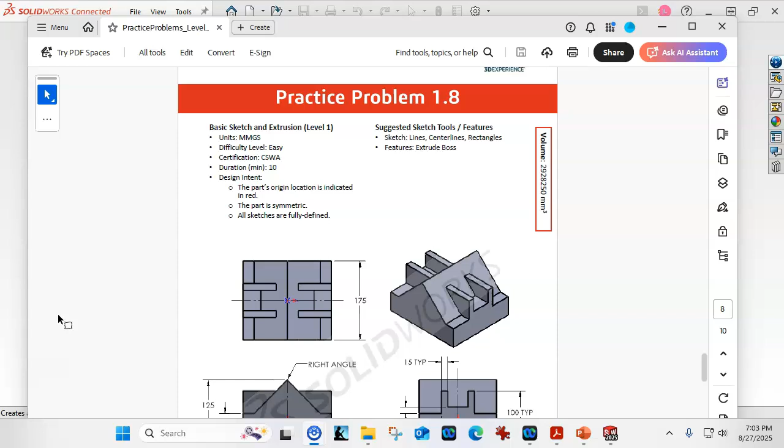All right, practice problem 1.8 is part of our assignment. Units are millimeters, grams, and seconds. The part's origin is indicated at the red location, bottom center. The part is symmetric about the right plane. Fully defined lines, center lines, rectangles, and an extrude boss.

All right, I'm going to slow down a little on this one because I was having way too much fun on 1-7. Let's go into millimeters, go to the front plane and sketch. Our geometry is going to be 50 at the front.

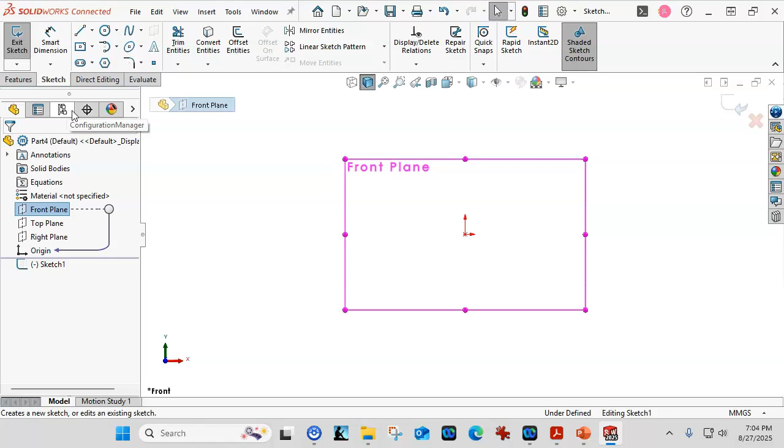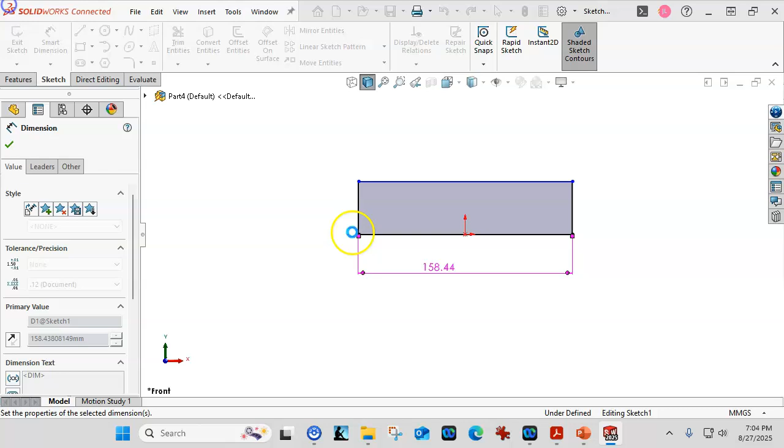So if we stay with the regions, I'm going to go with a midpoint and a dimension 200 by 50. And then we'll just pick up a center line. The overall is 125.

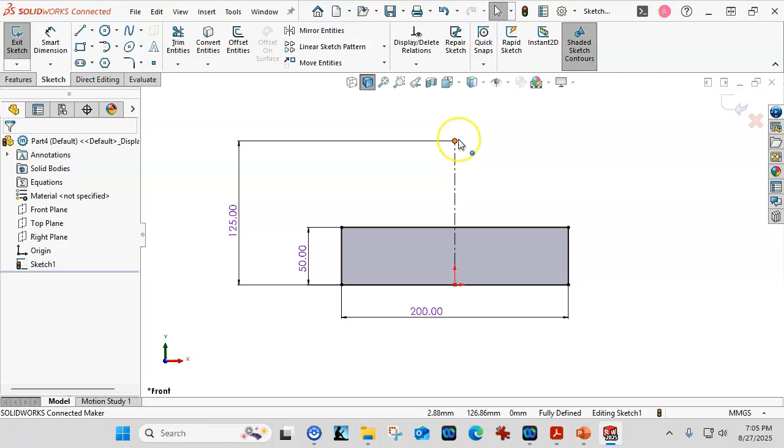Going the center line from midpoint, vertical, give it the dimension. And then we're going to bring the lines down for the triangle.

In this case, I need to establish symmetry. They're giving us a right angle at the top, but let's see what happens if I make it perpendicular and drag these back and forth. So they're not symmetric, so I need to add the symmetry. I could have mirrored this to get the symmetry, but we also need to introduce a symmetric relation.

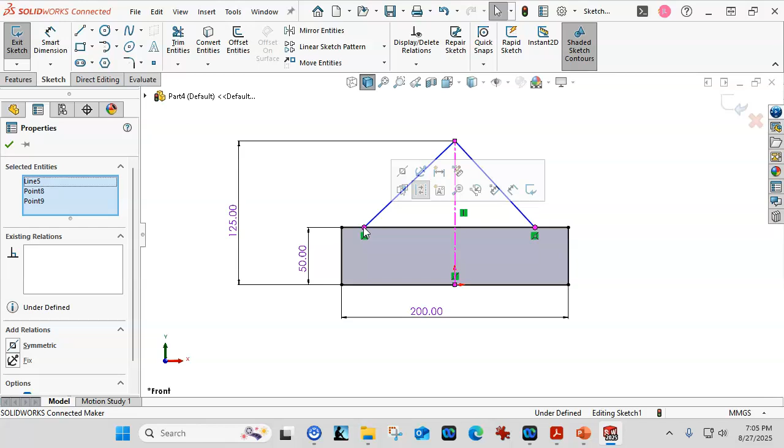So select, control select, control select. It doesn't matter the order. I could have done the center line and the two points and then gone symmetric. All right, that gives me the desired result.

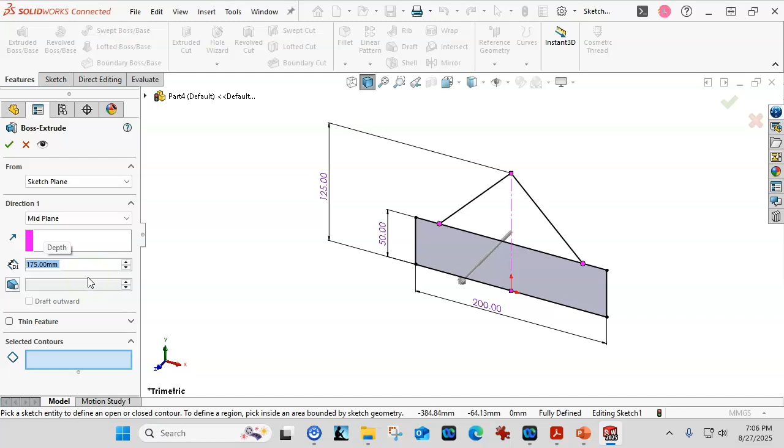We're going to go into the features, extrude boss base, and this geometry is midplane, and also 200, 175. The selected contours - notice that the center line actually creates another contour region, so I just have to make sure to select all of those.

And I could have trimmed again, but I think it's probably been a while since I trimmed regularly. I just work around the geometry, and I'm not so concerned with trying to trim it.

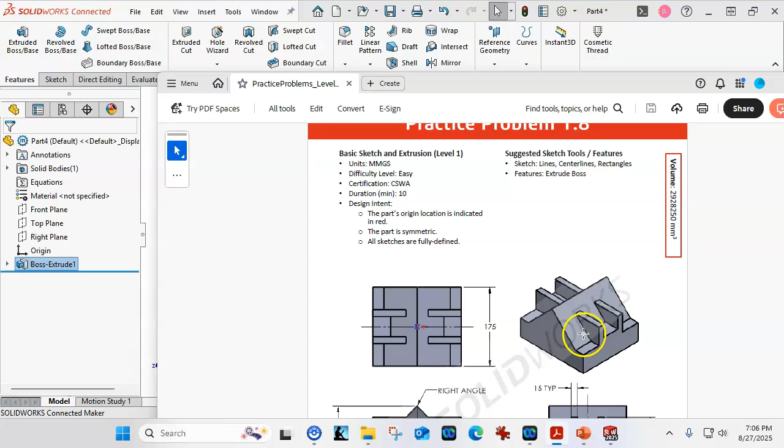So on the little tab on the sides, we can start at this outer face, or I could start on the right plane and go both directions. I think for our purposes, starting on the outer face is good.

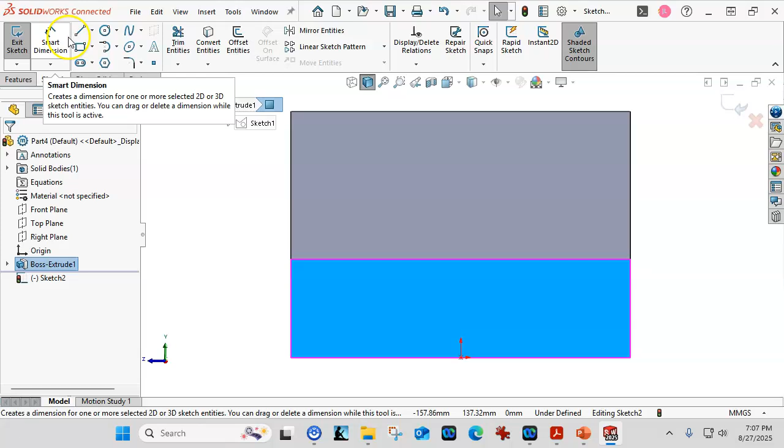So we have some geometry, 50 typical, and 15 and 15. That would tend to indicate that this is going to have some symmetry between those two across the front plane. So if I did something like that...

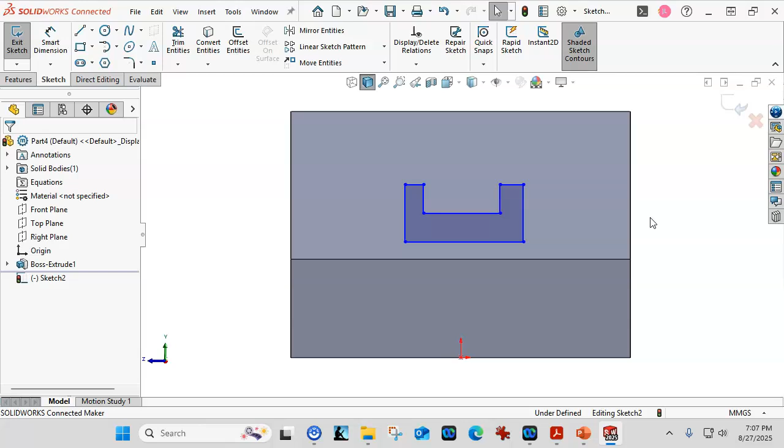And we start - I know I sketched that fast after I said I was going to slow down - so let's start with the first line, and I'm going to focus on the midpoint. If I right click and select the midpoint, I can pick the line and make it a midpoint, or I could pick the origin and make it vertical, because I'm looking at the long leg as vertical, horizontal is the short leg. So let's go with just making those midpoints.

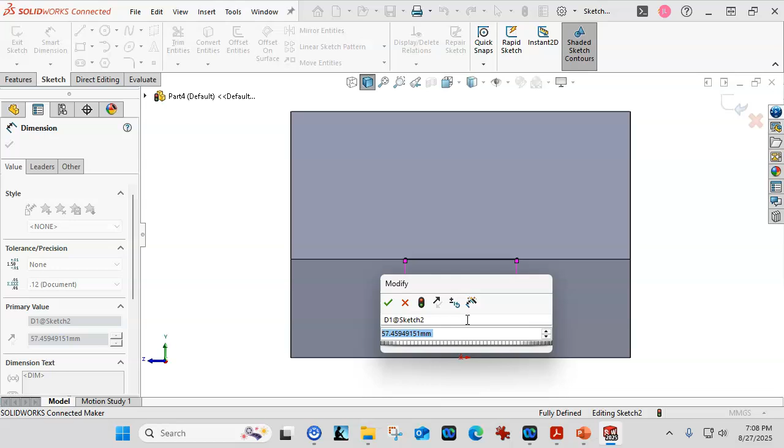And we were not given - so I don't really have that number. I wanted to put that number in, but don't have it. So let's go from the point, and we'll pick the edge because it's a nice, easy target to work from.

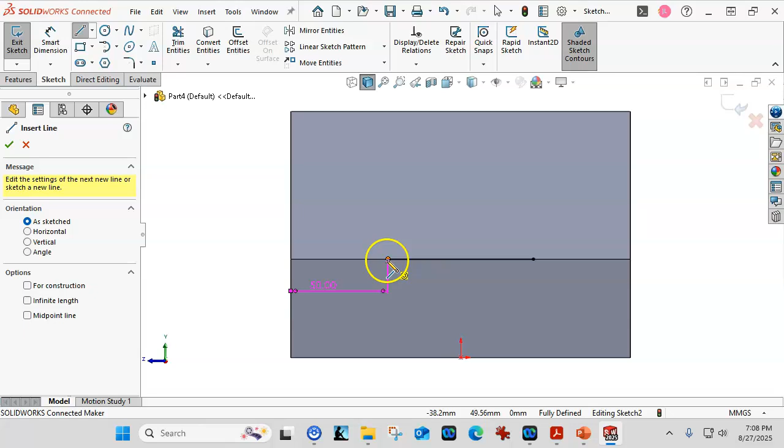All right, going up and then going over, and I'm doing the click drag thing again. If you click click, you're going to have that line be continuous automatically. All right, so the height - let's see, where do we calculate the height from?

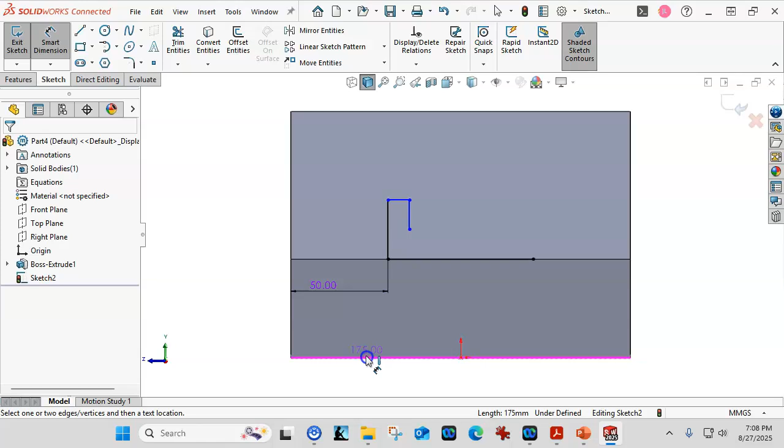100 typical, so from the base, and then the width, 15.

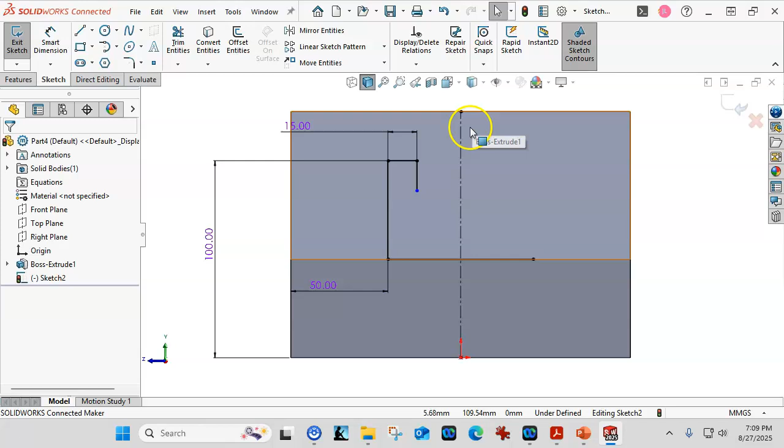And let's go through the mirror one more time. So I'm going to put a center line just between the upper and lower. I could have made it infinite length - back to the origin would have been fine.

And so for this, I'm going to go mirror, entities, pick those three, jump down to the mirror about. I see the preview, I'm okay with that. We accept it, we get our geometry.

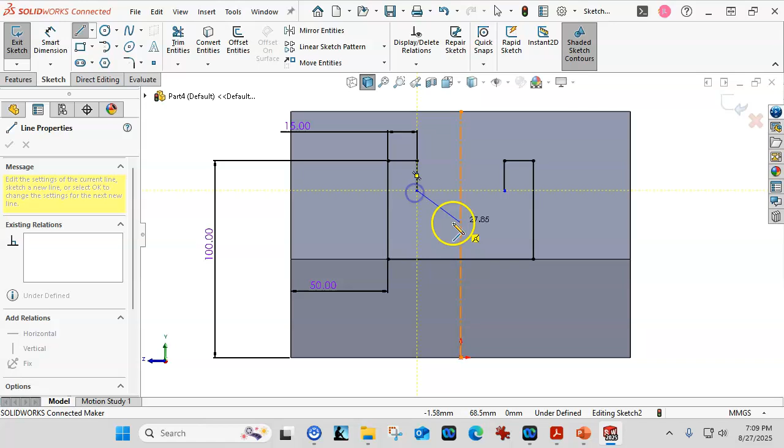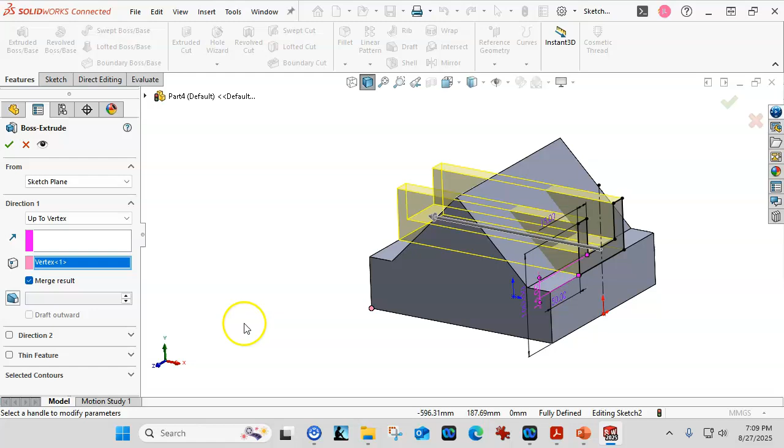And then I've got to click for my line, and we're going to pull that shape out. All right, so we used up to surface last time, so I'm going to extrude. For this one, I'm just going to tell it to go up to vertex. So vertex is where there's a corner, lines come together, edges come together. That will give us our finished shape.

So let's go ahead and save it. P1-8, and save, and let's see how I did. Mass properties, we have 2,928, 250. All right, I got one.

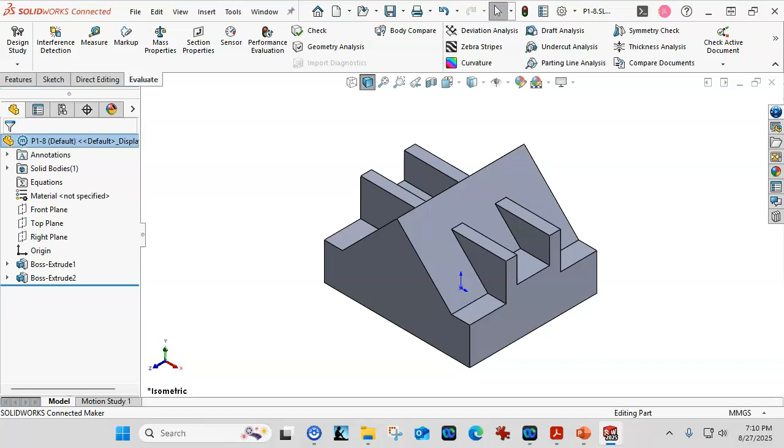So let's put that back up there real quick. I do want to point out when I say the center of mass - 0.001 grams per cubic millimeter is 1 gram per cc, cubic centimeter. And so this is the density of water at whatever, 68 degrees at sea level.

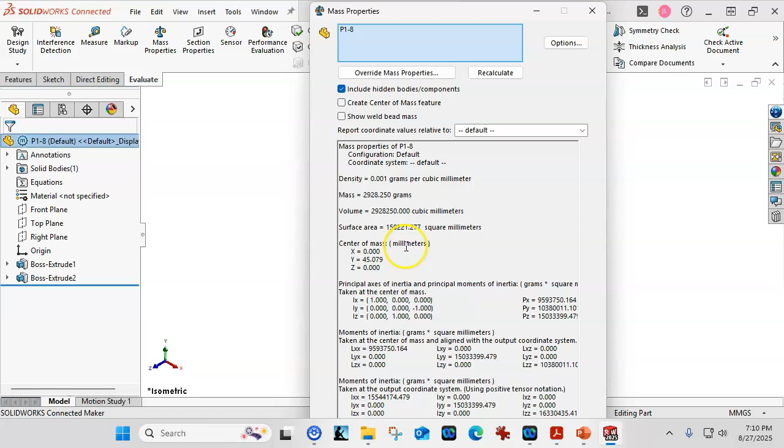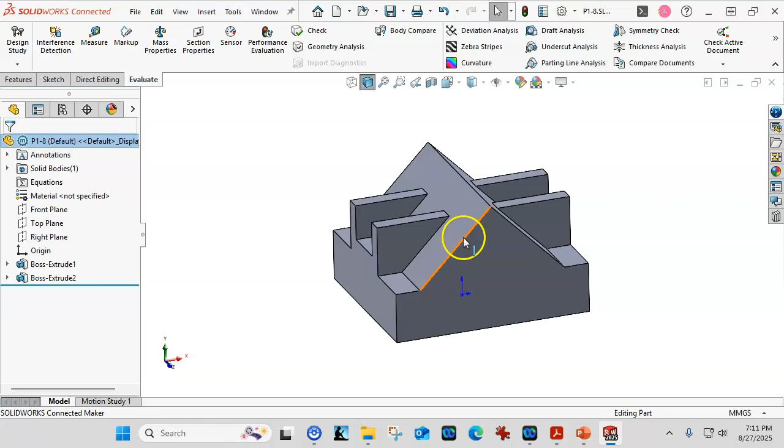And so our surface area, our volume, and the center of mass, 0 to 0 by approximately 45. So if we look at this, our moments are along X and Y, and there is no real tilt to it, but that is the point at which this would balance. If we try to tie a string to that point, it would tend to float. So that's the way I visualize it anyway.

So geometry is not overly complicated, but the order that you decide to do these features in, and the way that you pick your geometry, is going to determine a lot of how fast you can knock out these models.